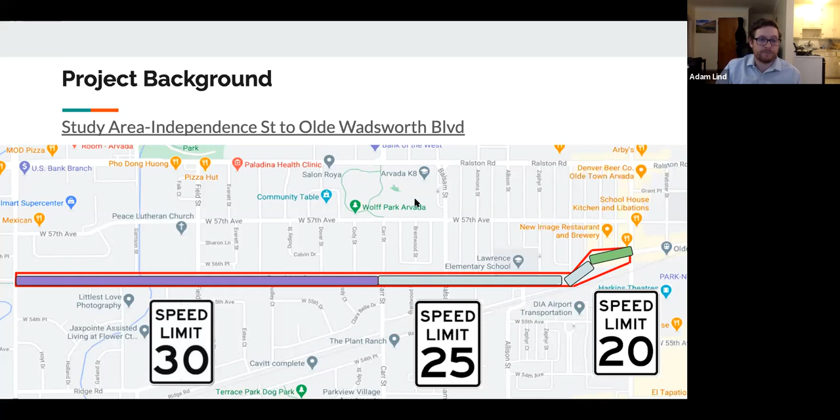For some background, the study area is on Grandview from Independence to Olde Wadsworth. It's made up of pretty much the same roadway and configuration, but has 3 different sections of speed limits. In Old Town it's 20, turning to 25 around the school east of Carr Street, and west of Carr Street the speed limit goes up to 30 miles an hour. There's also some additional information around that school.

We do have a school speed limit that goes down to 20 when flashing. We have a speed radar sign to reinforce what their speed is as they're driving through, and there's also a traffic signal to help students cross the street getting to and from school.

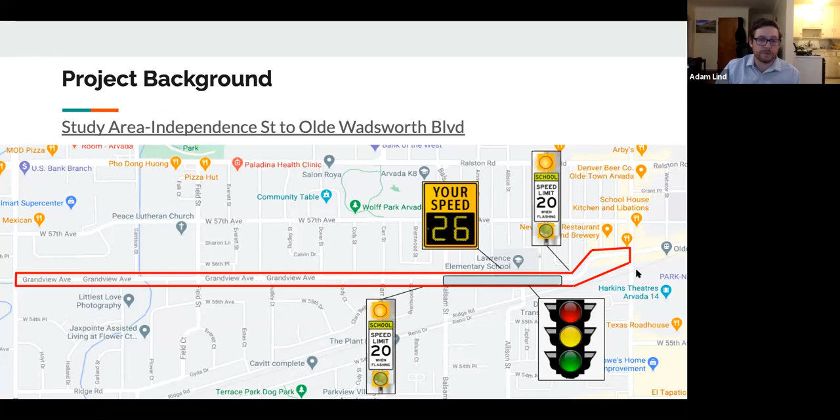Some more background, not directly about Grandview but related: the city initiated pedestrian safety pilot projects on Grandview Avenue in Olde Town and on West 57th in 2019. You may have seen the flex post bump outs and planters in Old Town, which was our first foray into traffic calming recently.

Our next step, we completed a corridor study of West 57th Avenue in 2020 with a lot of public engagement and multiple meetings, and we recently produced a final project there that we'll talk about in a few slides. That ended up recommending traffic calming, some separated bike lanes, and additional safety features.

When we presented this to City Council in early 2021, they recommended and directed us to look at traffic calming on Grandview Avenue, specifically because they hear similar requests about speeding and cut-through traffic, and the potential for traffic calming on West 57th to push traffic onto Grandview. So before moving forward with anything on 57th, we wanted to study Grandview Avenue and get public feedback to see where the community stands.

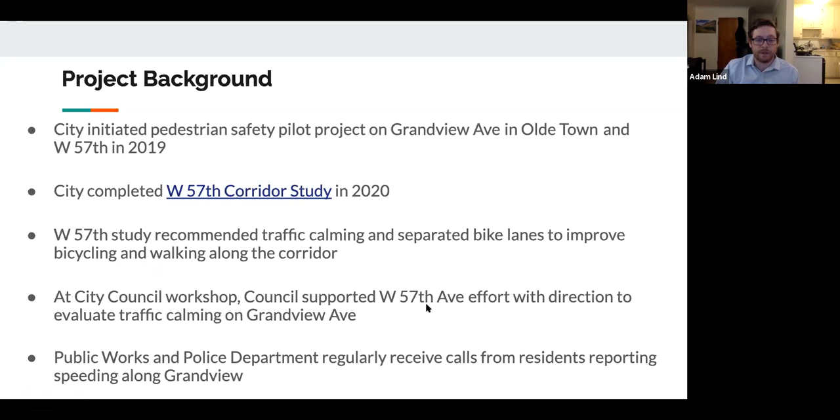In addition to council's feedback, our department and the police department received calls from residents reporting speeding along Grandview, and we've collected some data to show you what those results were.

The 57th corridor study was along most of 57th, but also cut down Garrison Street and west along Grandview to Independence, where it ties into the Van Bibber Creek Trail. We were looking at this corridor mainly from a pedestrian and bicycle perspective.

Not only how people can move along the corridor to connect to parks, schools, Old Town, Walmart, and the shopping there, but also how they would continue on to the Van Bibber Creek Trail, whether for recreation or transportation.

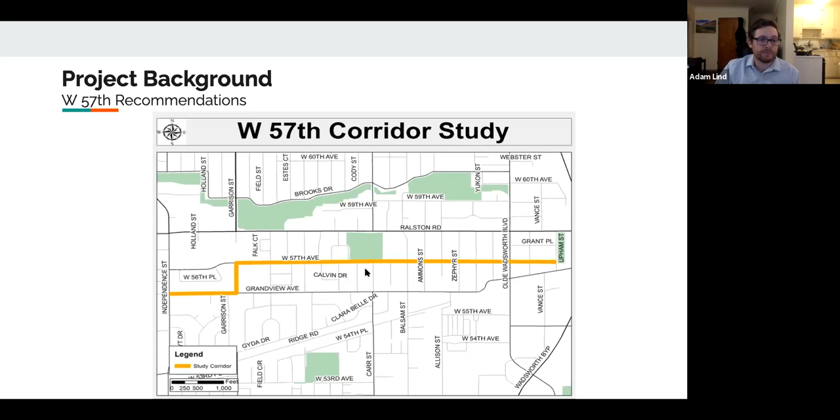This is just a quick snapshot of the results of that study. We have recommendations for the whole corridor, but this shows some of them. We've got separated bike lanes along the north and south side of the street, meaning there's physical separation between the travel lanes and bike lanes, which greatly improves safety and comfort.

It also recommended, at Carr Street and at Brentwood Street near the school entrance, what's called a raised crosswalk, combining a crosswalk, a speed hump, and a speed table. We'll show more details about that in a minute. Again, it's another way for people crossing the street to feel safer and for drivers to slow down as they approach crosswalks where kids are moving back and forth.

We also have a recommendation for a neighborhood traffic circle along Balsam Street. These are a few features recommended along 57th, and as you can see, having several of these could cause some drivers to divert onto 58th or down to Grandview.

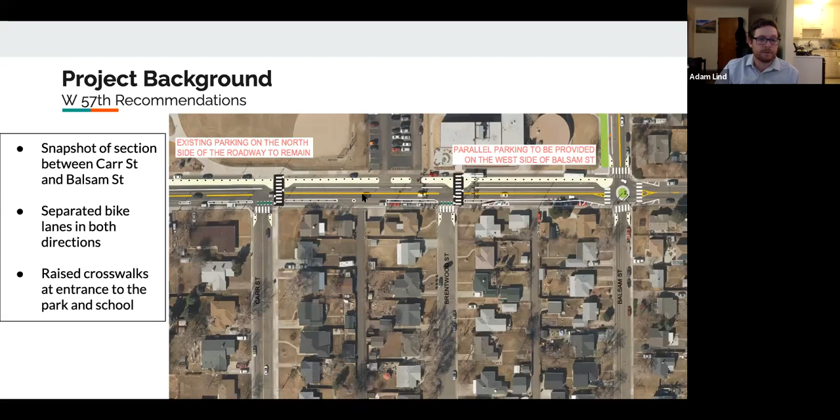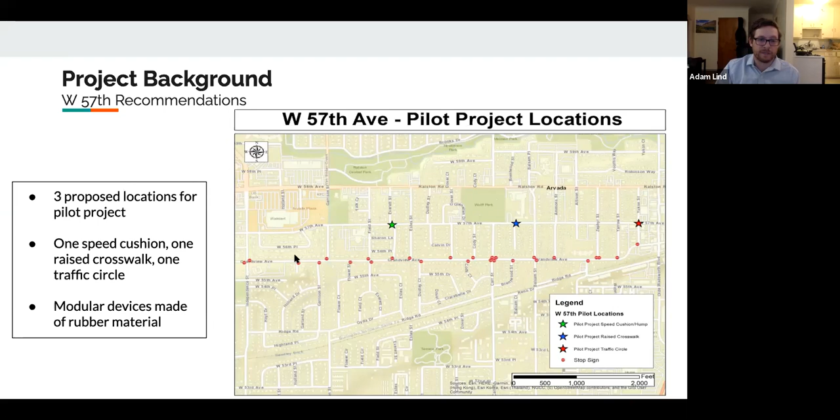We chose these locations trying to geographically spread them out through the corridor, but also based on where we get the most requests for help and assistance, at Yukon, and also trying to benefit the kids walking to school the most. So that's where we're starting with 57th, and we'll show how this ties into Grandview in a bit.

So what is traffic calming? According to the FHWA, the Federal Highway Administration, the purpose of traffic calming is to support the livability and vitality of residential and commercial areas through improvements in non-motorist safety, mobility, and comfort. Mainly what you're trying to do is reduce speeds, especially speeding vehicles.

The design we're recommending isn't to try and get people to go 10 or 15. We're trying to cut down those people going 35, 40 miles per hour as they speed through these neighborhood streets. Traffic calming measures can consist of horizontal, vertical, lane narrowing, roadside, or other features that use self-enforcing physical or psychoperception means to produce desired effects.

What that means is when you have a narrow lane versus a wide lane, you have a feel that the road is tighter. It's not any less safe, but it does show the effects of causing people to drive slower and speed less.

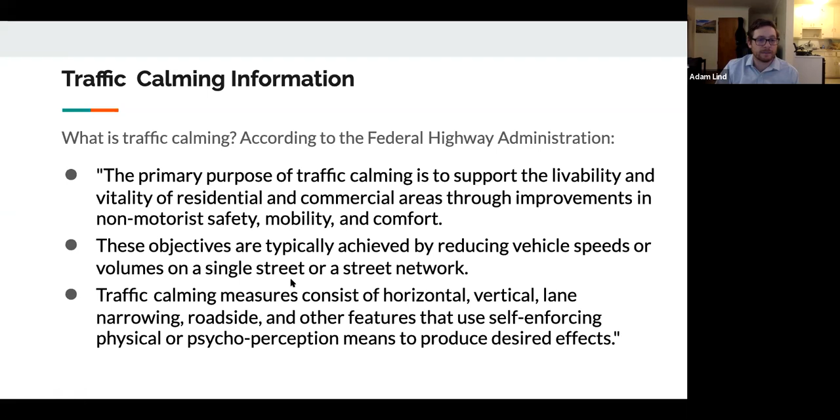So another question is why would we look at traffic calming? The main benefit is that traffic calming is present and effective 24/7. We've heard requests for police officers, and the police will come out when they have the chance, but there's not enough officers or resources to really be there, especially on local or neighborhood streets 24/7.

So these devices reinforce that speed control 24/7. It's relatively low cost and high benefit to achieve that goal of speeding reduction. There's lots of research proving this to be successful, and the benefits of lower speeds are not only safer, but give you more reaction time, so it's likely to reduce the number of crashes.

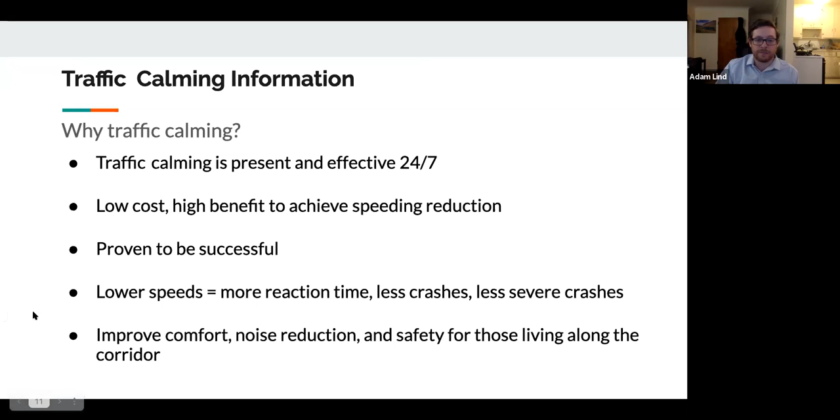And since people are driving slower, those crashes that do occur will be less severe. For those living on the corridor, it improves comfort when you're out walking your dog or your family, less noise from people speeding, and more safety as you're trying to cross the street and get to some of those destinations.

Here's a quick overview of a few different examples we're going to talk about, and some that we're not. Speed humps are here on the left, which generally cover the full width of the roadway and are a solid raised platform. Speed cushions have cut-throughs for emergency vehicles.

Traffic circles, some of you might be familiar with. In the city, we have one kind of neighborhood one similar to this at Hoyt and 52nd. And then chokers and bump outs narrow the roadway down and help visually narrow the street to help reduce speeding.

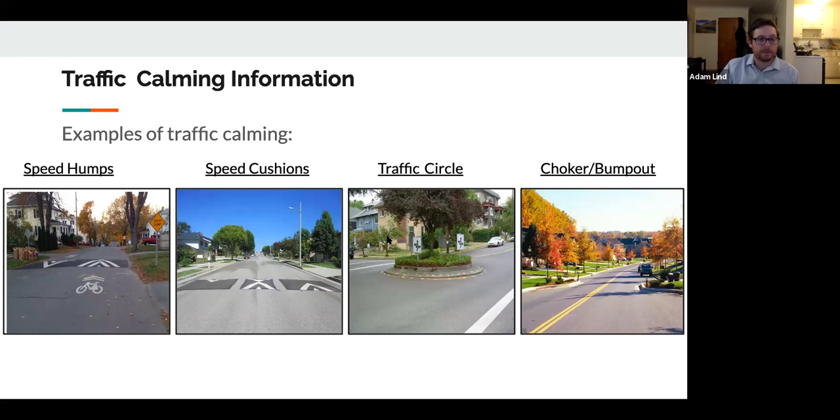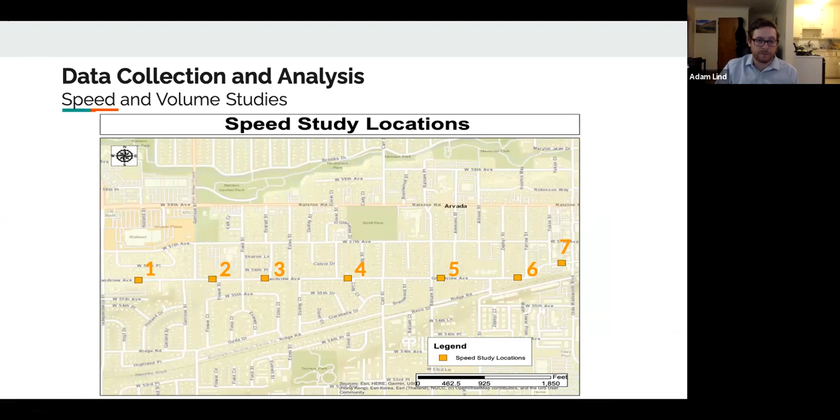Getting into some of our data collection and analysis, in the last year we did 7 different speed counts here along the corridor, covering from west to east, generally spaced about 1,000 feet or so. That way we felt we could get good coverage of the different speeds across the different speed limit zones and across the corridor.

There's a good bit of information here, and we'll give some time for people to take it in and look at it. This information is also available on the Speak Up page with the interactive map where you can click on the speed locations and this information will pop up.

So location 1 starts at the west, 7 at the east. And what we've highlighted in red is more or less where we have people speeding 7 miles per hour or more over the speed limit in one direction.

So this is kind of what we in the city have identified as the speeding issue. More than 7 is an issue, less than 7 is less of an issue where we wouldn't necessarily push to implement traffic calming. And since we pretty much have this speeding issue from the west end all the way to Balsam, we've proposed to have these traffic calming devices in that section.

Looking at number 6, that's in the 25 mile per hour section, and speeds were about 3 miles over. Then you get into the 20 mile per hour section and speeds around Old Town are under the speed limit, which is great to see. The volumes here are between 2,500 and 3,000 for the most part. So that's what we expected for this street, and we'll talk about what that means in a second.

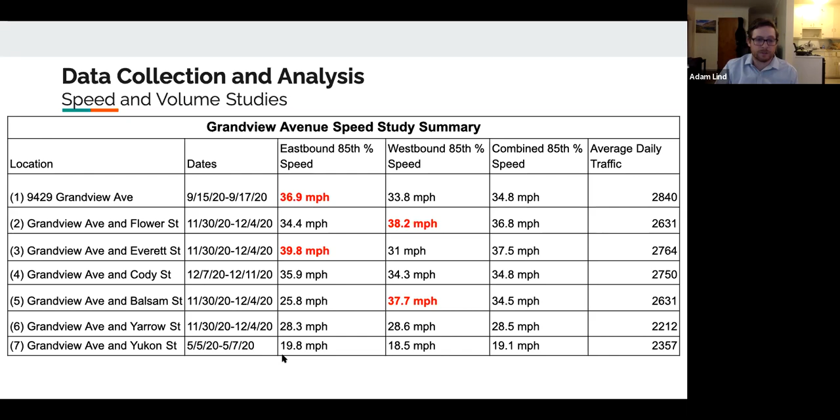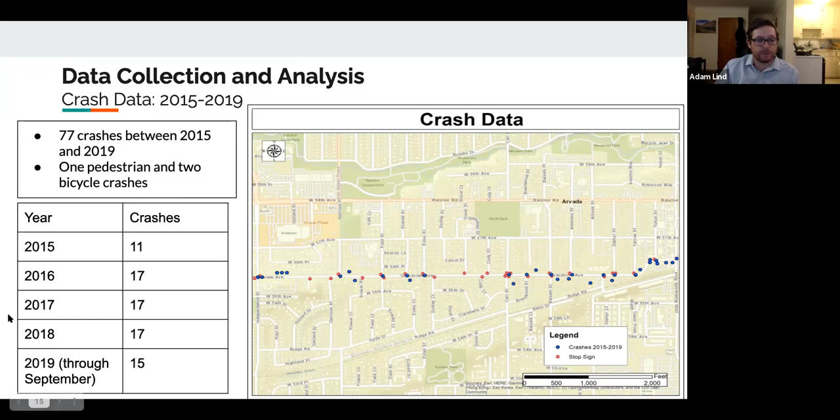Looking at crash data as well, the crashes have been pretty steady since 2016, more or less. They are spread out throughout the corridor. There isn't really any major clustering, but there has been 77 crashes between 2015 and 2019, and of those, there was 1 pedestrian and 2 bicycle crashes. So anything we can do to reduce that number would be beneficial for the community, safer for drivers, and safer for everybody here.

So to summarize the results here, there's several locations on Grandview in that 30 mile per hour zone and 1 in the 25 where we have speeding of 7 miles per hour or more. The vehicle volumes represent what the range between a minor collector and a collector classification for the city. So it's not functioning as a local street; it really is functioning as something a little bit higher to get people from Independence to Old Town and beyond.

The bike and ped route that we mentioned along that 57th corridor study to connect with the Van Bibber Creek Trail, which includes Grandview west of Garrison Street, 36.9 miles per hour. So if you're biking on the road by yourself as an adult or with your family and kids trying to get to the trail and into Van Bibber, you're really not going to feel comfortable in that environment.

And the permanent speed radar signs and school zone signs have a limited effect. They're pretty good in this area based on the design, but research generally shows that speed radar signs lose their effectiveness the longer they are out there.

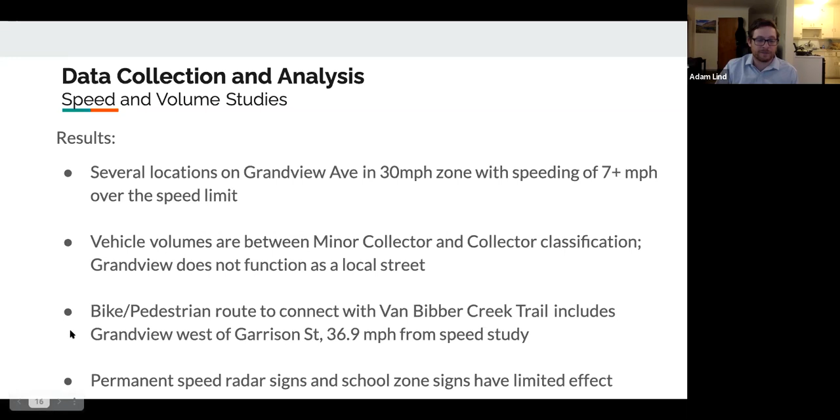So from our perspective, we're choosing to take a proactive approach to this and move the project and propose this project to solve these speeding issues that we've found. So recommending physical devices to manage speed without constant police department presence, which is more or less not very feasible for them to be out there all the time.

The police spend a lot of their time enforcing speed limits on higher speed and higher volume roads. So they're more likely to be on a Wadsworth or a Kipling to get people going 60 and 70 in a 40 or a 45 than putting resources towards a street that has a lower speed and a lower volume.

We're proposing to reduce the speed limit in that 30 mile per hour section to 25 so that it's a consistent speed limit across the whole corridor. There really isn't a good reason why one section is 30 and one is 25 based on the design of the roadway, so we feel that making that consistent will be a benefit.

The traffic calming treatments on Grandview Avenue will help with cut through traffic. So if people are using Grandview to bypass other streets, they won't be able to choose this one as kind of like a free flow. There'll be those devices to help limit that cut through traffic.

As we mentioned, traffic calming has been shown to increase safety for vulnerable populations and roadway users, which means people walking, biking, rolling, wheelchair users, etc. And this will also help to support bicycle and pedestrian access to those neighborhood destinations, whether it's the schools, parks, Old Town, or elsewhere.

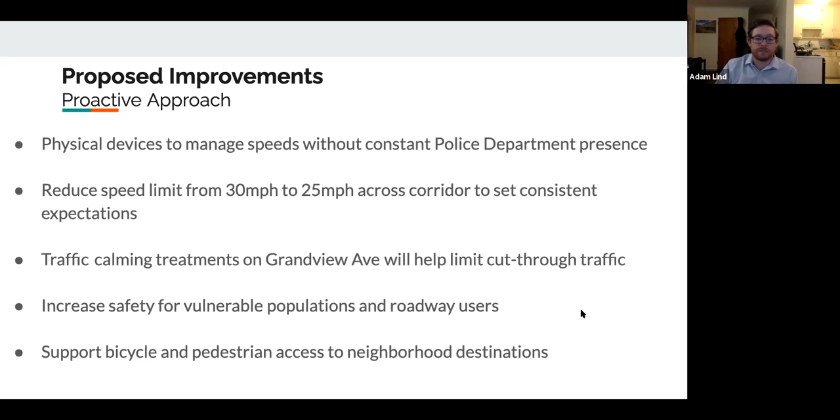Some of the research shows between 250 and 500 feet is ideal; otherwise you'll have people speeding up in between devices. But this range between 400 and 600 seemed to work best for this corridor.

So we know that we get questions about why not just putting stop signs along the corridor, so we wanted to answer that question as well. Stop signs exist to assign right of way and are not used for speed control, so that's one of the main reasons. There are strict guidelines for when and where to use stop signs, in a kind of engineering guidebook called the Manual on Uniform Traffic Control Devices, MUTCD.

You may have heard of this. It really looks at roadway volumes, crash history, and things like that to say when and where you can use stop signs.

One of the downsides, if we decided to just put a stop sign somewhere along this corridor, say at Field Street or Everett Street, where maybe the warrants weren't there, is that they become unexpected for drivers. You get people running stop signs or not expecting them, and it can lead to more crashes. So we really try to follow the MUTCD and the warrants prescribed there when we implement stop signs and all-way stops.

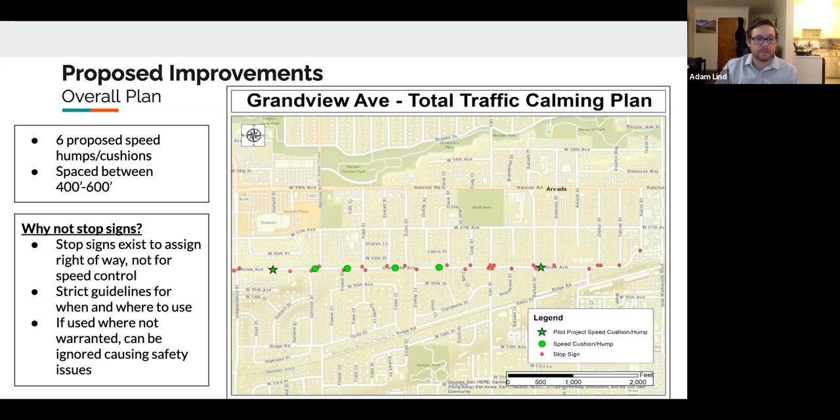So again, what we're talking about along this corridor is both speed cushions and speed humps. A speed cushion consists of two or more raised areas placed along the roadway. They're similar in height and length to a speed hump, but the main benefit is that there's space in between, whether it's in the middle of the roadway or the middle of a lane, allowing emergency vehicles to pass through without having to slow down.

So this is something we've been coordinating with our fire department and other emergency services on. With there being a fire station on 57th, we had a little bit of a different conversation there, but we wanted to open up the discussion here as well about speed cushions and speed humps.

A speed hump is an elongated mound in the roadway that covers from one side to the other, pretty much curb to curb. This includes even where there are parking spaces, so drivers can't weave around to the parking space to get around the speed hump. They're typically 3 to 4 inches in height, and they're designed to slow people down to between 20 and 25 miles an hour.

Speed humps are a little different from speed bumps, which most cities don't use anymore. That's the really short and high speed bump that produces a strong effect and isn't really comfortable for anybody, and has some downsides. So cities have generally moved away from those and gone toward this speed hump or speed cushion design, which is still effective but less annoying or painful as you go over it.

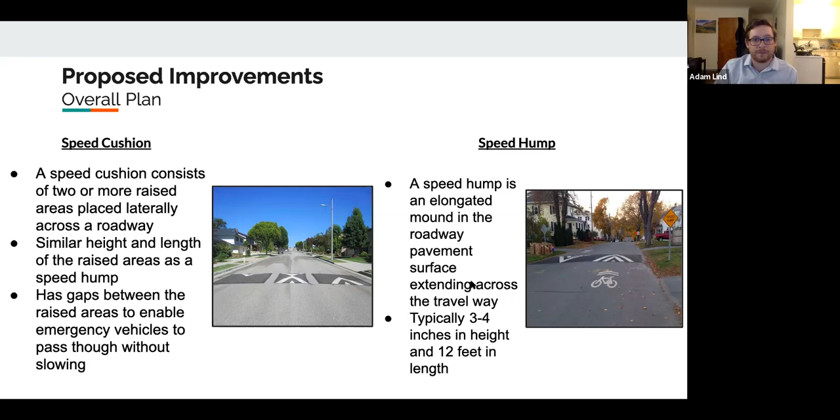To focus on the pilot project locations, we have two proposed locations, one on the west and one on the east. We're looking at potentially doing a speed hump on the west side, and a speed cushion on the east side. We felt these were the best locations to show that once you enter this corridor from Independence, hey, this is a little different, slow down, it's a neighborhood. Same thing on the east — if you're going into the school zone, you get that same reminder to slow down, this is a different area. And if you're coming west, you've already gone through the school zone and seen all the signs, so it's a reminder not to speed up right here.

The other item with our pilot projects is that we're planning to use modular rubber devices, and we'll get into more details about that, but it won't be a full higher-cost construction at the time of initial installation.

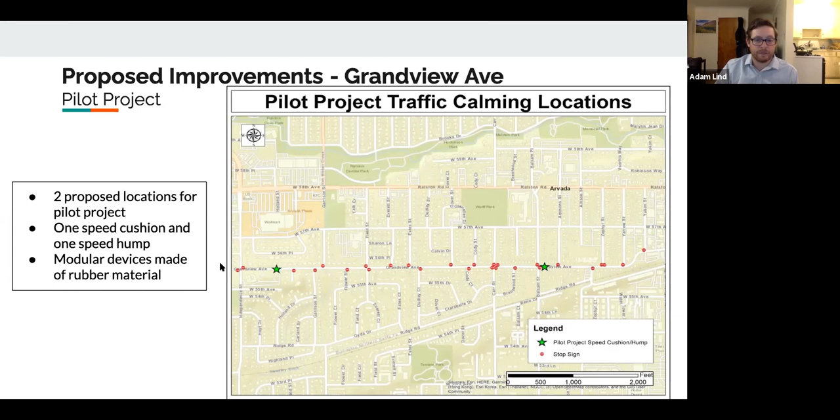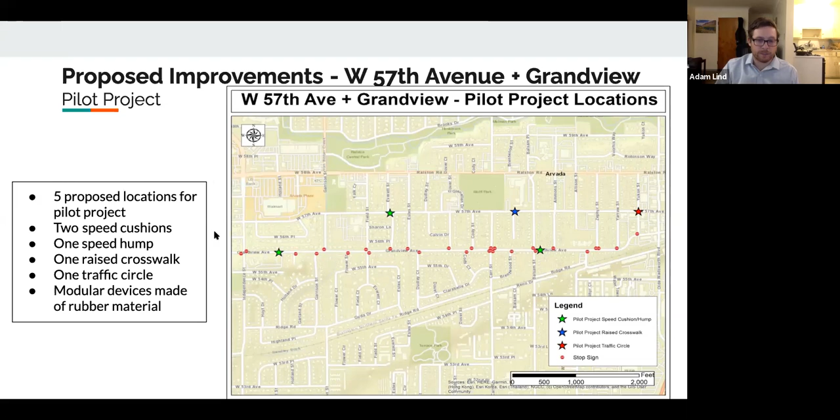So again, this is just showing the locations we proposed at 57th for the pilot project, and here you can see everything together. We've got it more or less equally spread out geographically from the west side to the east side, with a few different devices we're trying out. The real goal for us is to test these devices, to see which ones are effective both from a data standpoint of speed and a standpoint of public feedback on which ones are beneficial and work for the community. If speed humps don't work but speed cushions do, then as we move forward and potentially make these permanent, we would know to just use speed cushions instead of speed humps. So this is our pilot project goal for both corridors if we move forward.

Another benefit is, if we go through this process and they work, we can use these modular devices again at a different location. That's a cost-efficient way for us to continue this project as we expand it to other areas of the city. It's about 20 to 40% of the final cost for a permanent installation, focusing on cost efficiency and testing these devices before we know how it's going to work for the city and the public. This is a much more efficient and cost-beneficial way to install these devices and test out traffic calming.

So talking about the process, if we decide to go forward, here's how we'll measure data and collect feedback. We plan to install the devices on West 57th first, then on Grandview if supported. That's because we've already gone through this process with the public and city council about 57th, so this is our first go-around. We'll focus there first, then shortly after apply these devices on Grandview, which gives us time to collect data about diversion once we've done installation on West 57th.

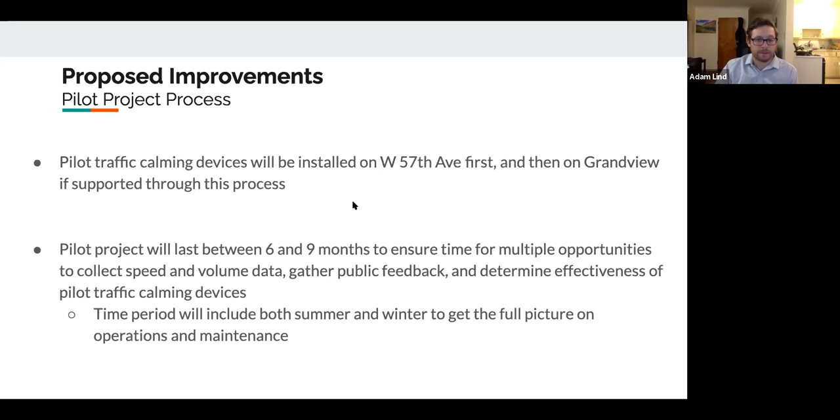The pilot project period will last between 6 and 9 months to ensure time for multiple opportunities to collect data, gather public feedback, and determine effectiveness. We're showing that time range because we want to make sure we're covering summer, spring, and winter to get the full picture on operations and maintenance, and see how our maintenance crews handle this during snowstorms and things of that nature.

The data we collect will be shared with the public and presented as a final report, and we'll likely schedule a workshop with City Council to present that information before making any decisions about moving forward with the results. At that time, we'll make a recommendation that could be to continue with these devices in their modular form. We're starting with 2 on Grandview; if those are successful, we could add 2 more before making final decisions. Or we could say this is working and we're ready to make all 6 devices permanent in asphalt along Grandview. So it'll depend on the feedback and data we collect.

Lastly, the permanent traffic calming devices would be installed with future street repaving projects. It's likely that Grandview will get repaved in the next few years, and depending on when that happens, we would make the switch from modular to full pavement design with installed traffic calming devices.

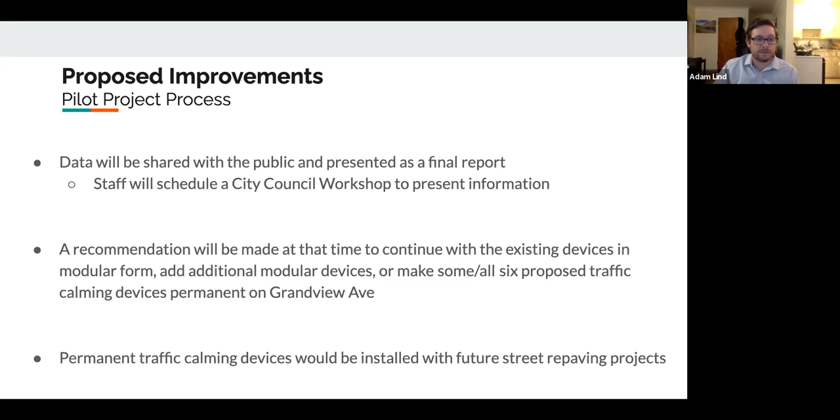So with that, I will open this up for questions.

We got 2 questions beforehand. One was from a resident asking if we could have traffic calming devices between Carr Street and Independence. I'm hoping if you're here, you see that we have one proposed for the pilot period, and if we move forward with all 6, there are several in between there.

The other question was related to police enforcement and ticketing. We reached out to our traffic enforcement unit prior to this meeting. They say they're available to come out on request, but in past opportunities where they've done enforcement, they haven't really clocked anybody at a speed that gives them grounds for a ticket. That's one reason why we want traffic calming out there, because our data shows people are speeding 7 to 8 miles per hour above the speed limit. But you get that effect when a police officer is out there — people see them, slow down, and then they don't write those tickets.

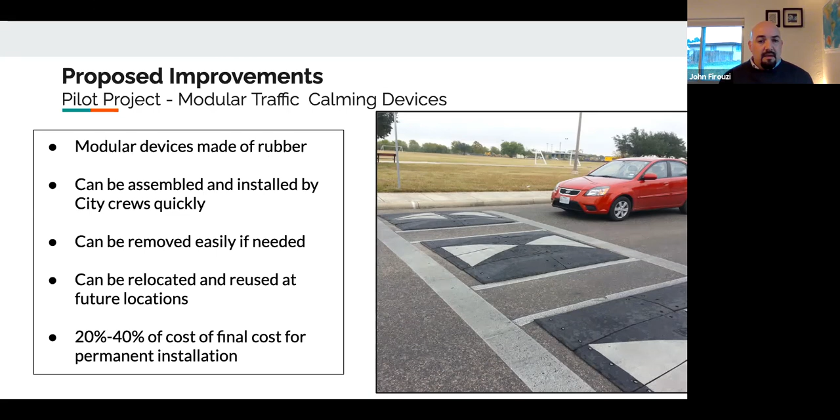One last question, Adam, and maybe this is your last slide: where's the best place to leave feedback and suggestions going forward? I think you have a Speak Up page, is that correct? Yeah, so on the Speak Up page there's a survey you can take, and at the end there's kind of an open-ended 'tell us more.' There's a section on there for ideas you can post. And then you can also just email me directly, alind@arvada.org, and we'll compile all the questions, comments, feedback, and use that as we make our decision.

And for those of you who've suggested that maybe one isn't enough, or that the main issue is after Carr Street, please give us that feedback, and we can potentially move one of these speed humps from west of Garrison to east of Garrison, closer to Carr, or potentially add another one if we hear enough from the community that that's where they want the issue addressed. So in addition to whether you think it's a good idea or a bad idea, if you have other ideas about different types of traffic calming, other solutions, different locations we should choose, please provide any and all of that feedback.